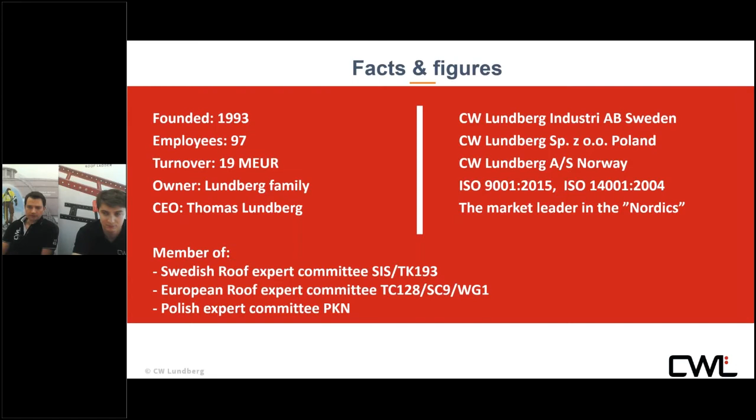We can say for the Nordic countries, we are the market leader. We put a lot of emphasis on creating and working together with European committees that write new norms when it comes to roof safety equipment products.

The majority of the products are tested in Sweden in the research institute called RISE. It's a notified body, so they can perform the tests for harmonized norms, and by harmonized norms we can receive the CE mark.

We also work together with the Technical Research Institute in Sweden, from which we received the P mark, which you can see on the screen. The P mark, together with information about norm 516 and 517, gives you the information that it's safe to anchor yourself with a fall protection equipment.

We also work with the Austrian Standard Institute, one of the few institutes that have a snow fence norm. We also have the Swedish fork, which gives us the information that the company fulfilled the Swedish building regulations and keeps the quality of the products.

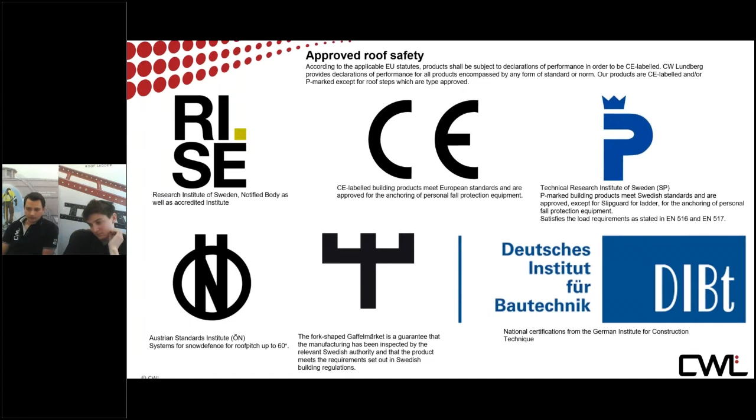Just recently we also started with Germany, and together with the Institute DIBt we try to perform some additional tests for our products. I will give the microphone to Adam, who will tell you a little bit more about the products.

Hello, here's Adam. As Konrad mentioned, we are a producer of roof accessories. I would like to show you one of the kinds of our products - fall protection equipment - and on the screen you can have a look at the wire system and the anchor point.

The wire system is a much more efficient solution because the user is, during the work, all the time protected. He can freely move through the intermediate points. Our wire system is designated for 2 persons at the same time. As Konrad mentioned, it satisfies standard 516.

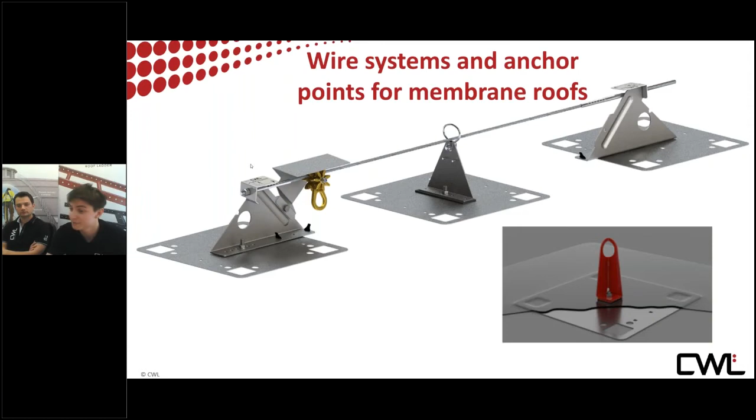In the bottom right corner, you see anchor points - it's for 1 person. This is a wire corner to wire system. You can change direction, for example.

Also mounting on the standing seam. We have a solution for all kinds of roofs - this is for bitumen as well, for PVC.

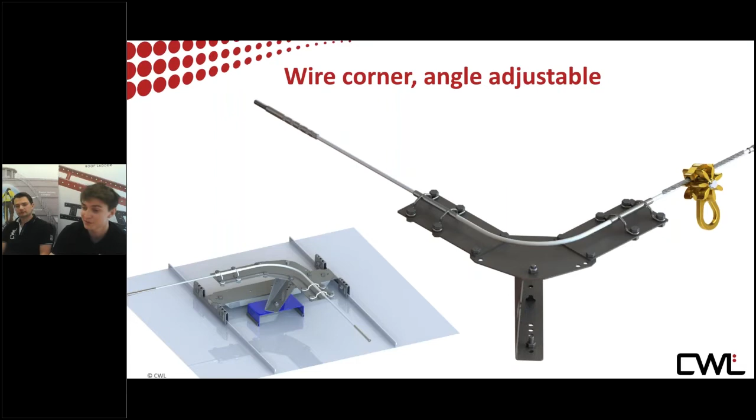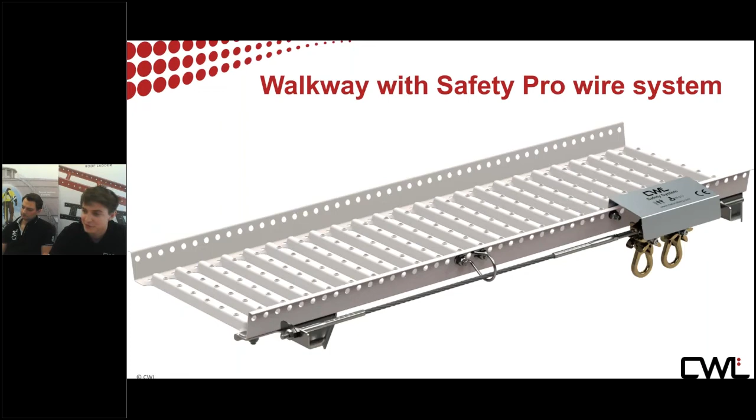It's also an option to walk on the roof on a walkway, which also protects the main membrane. We can also give the extra feature, which is a wire system. Same situation for the walkway - we can change direction by corner.

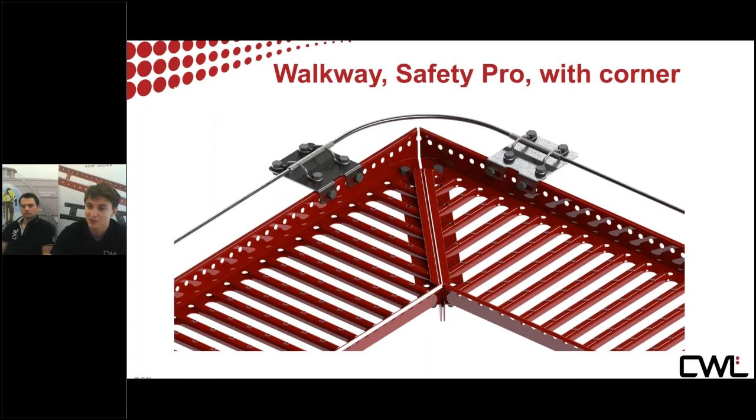The best way to protect a roof edge on a flat roof is, of course, the guardrail. Guardrail satisfies the standard at 1 meter 10 centimeters high. On a PVC roof, you need to mount it with extra fasteners, but I will show you on a video.

Okay, this is a mounting video. Here you can have a look.

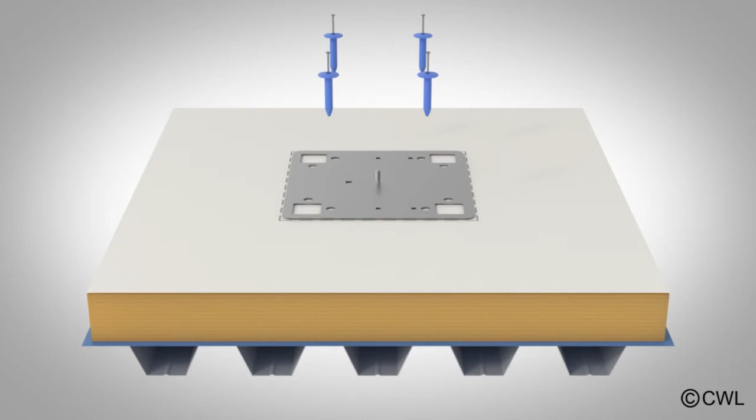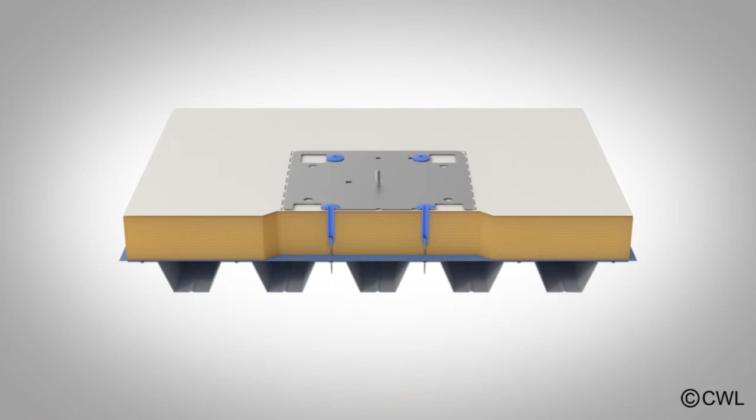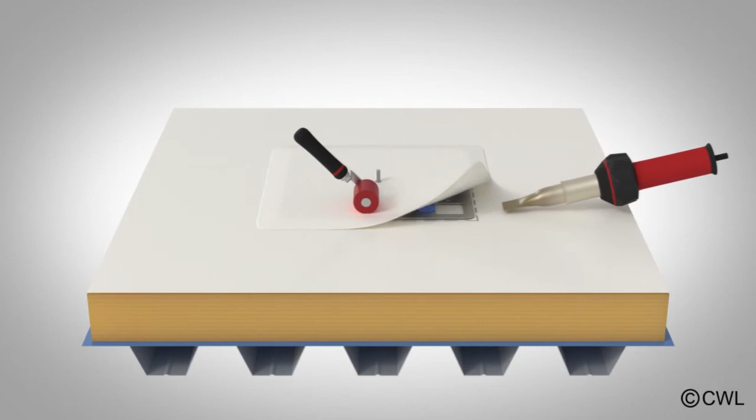You have to put it directly on the existing PVC membrane, with an extra layer of PVC. You have to weld the 4 squares, which stop it from moving around the plate. Then you weld the surface around the plate. On the top, we mount a start bracket.

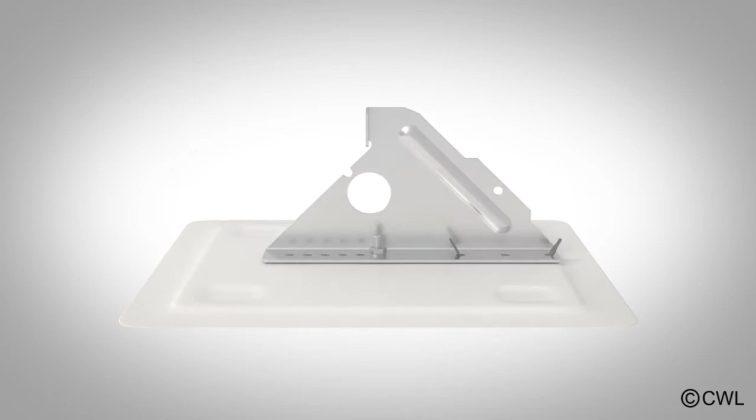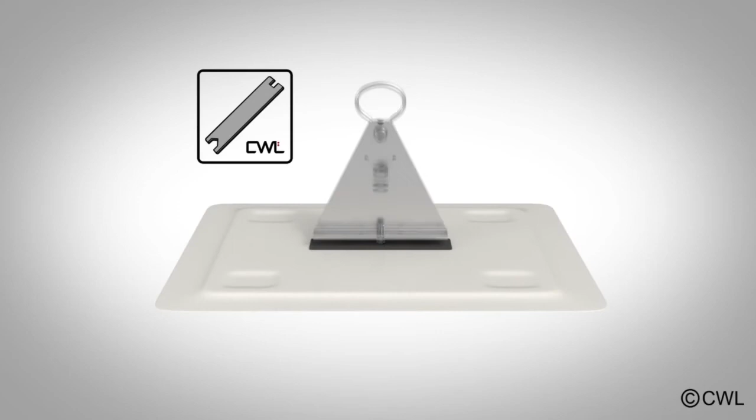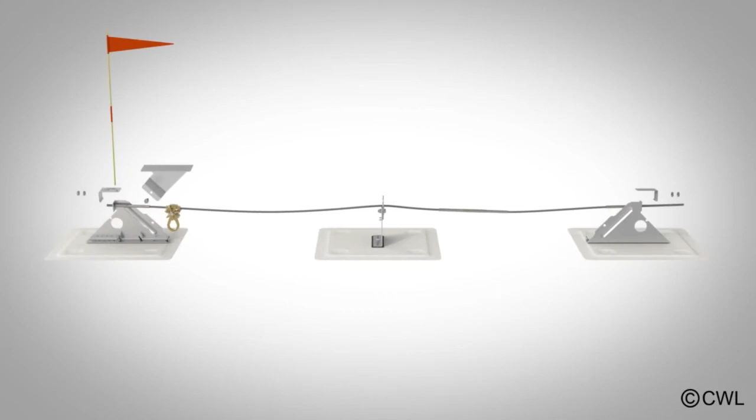Here we have an example for the intermediate point. We mount the intermediate point in the same way as the anchor point, which you have seen previously. We have a CWL tool - this is an extensible wire system, so we have it in pieces, with a small roof for the wire runner.

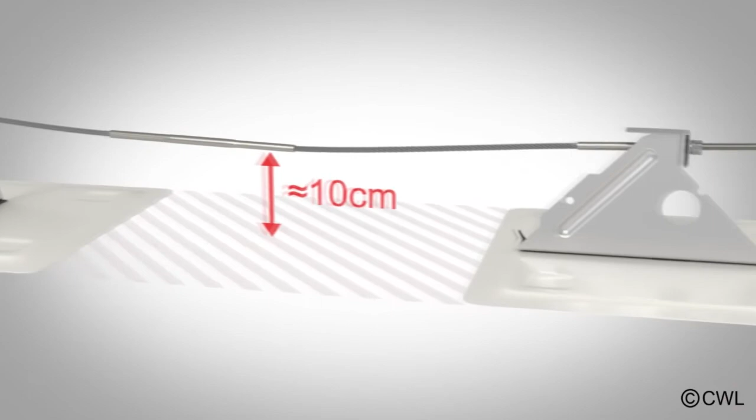And it moves freely through the intermediate point.

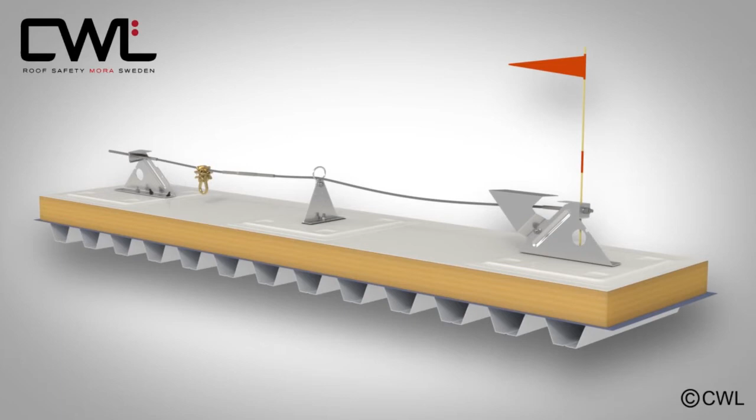Thank you for the video. We're back to the presentation.

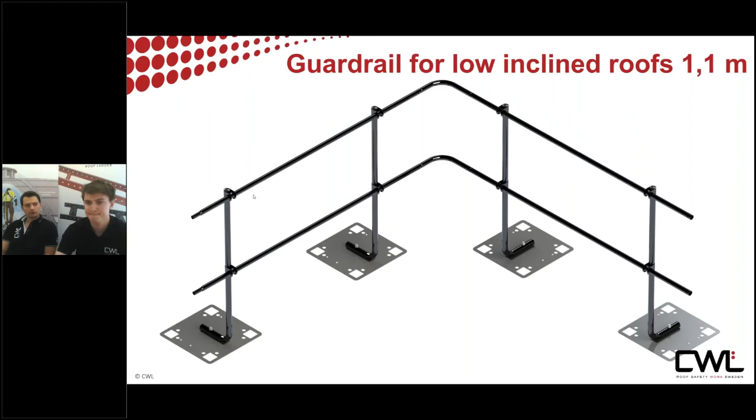It's good to tell you that you can have 2 runners on one wire system. That was a video.

We recently joined the BIM object. We have made all our articles in BIM. We have it as an intelligence object in Revit files, like Revit families, also some in a project. So everything is available on a website.

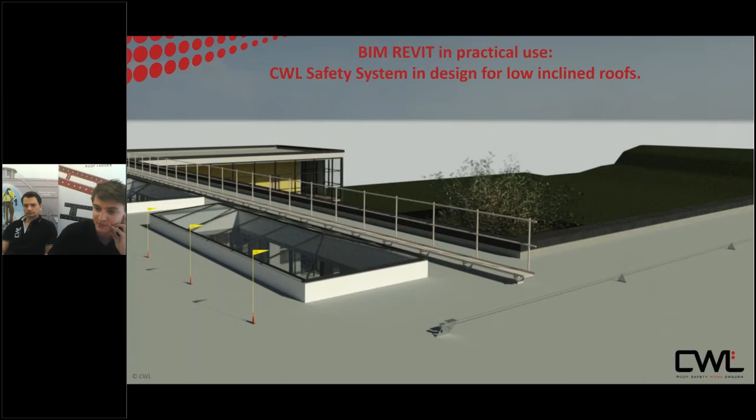Then you can check it directly from the link. Here is the example of a rendering photo. On the image, you see our wire system, anchor points with the flags, and walkway with the barrier.

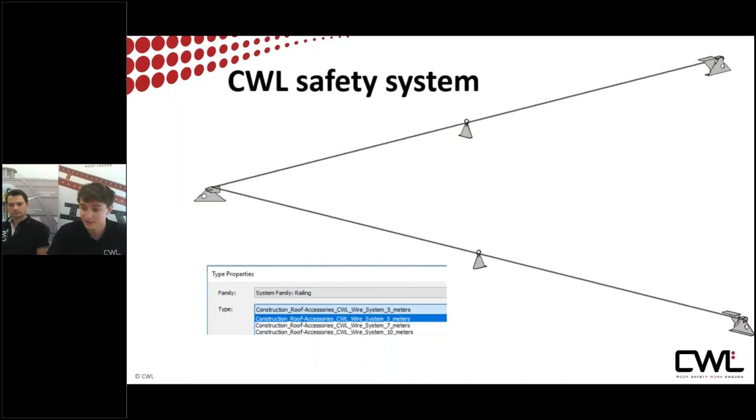This is an example of the file. In the file, you can choose what type. This is exactly the types we offer. It shows five, and the distances between intermediate points in the wire.

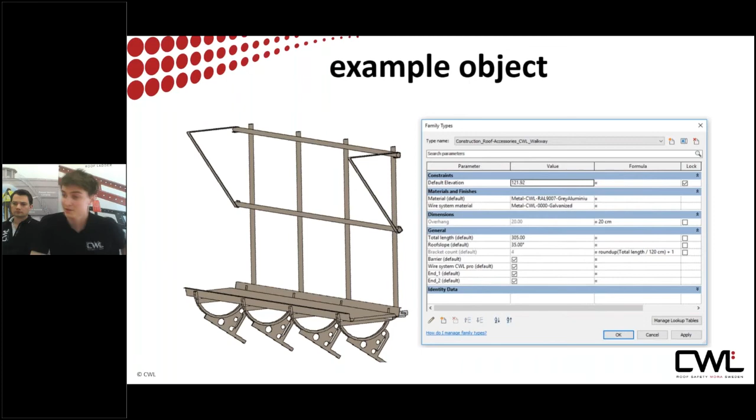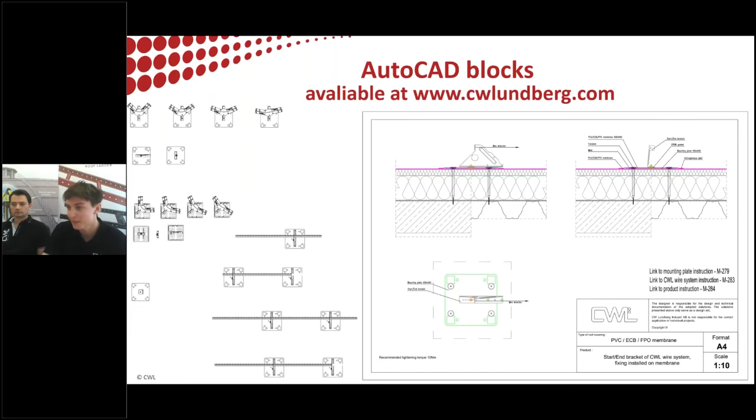Also, we have support for AutoCAD, so everything is available on our website - AutoCAD blocks which you can use in your project. Also details as a section through the roof. All that is available from our website.

And a short recommendation about projecting: the most dangerous zone on the roof, on a flat roof, is the zone 2 meters from the roof edge. So we mount a wire system or our security devices in this area. Also, you can notice that entry points or skylights are also deadly.

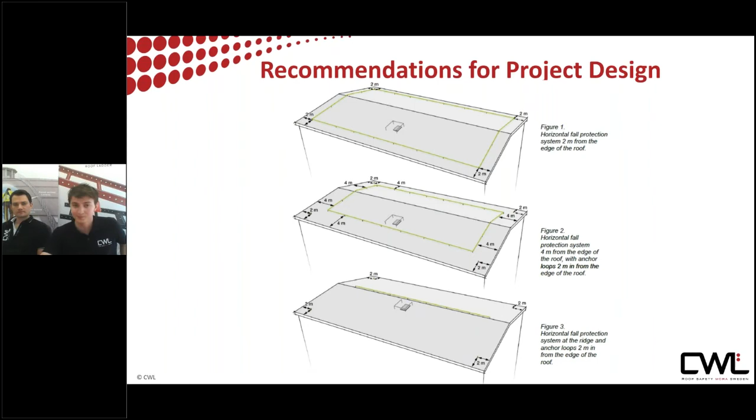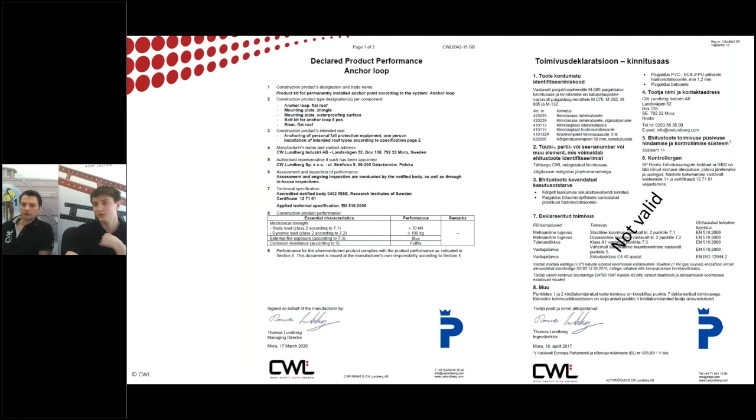Here is an example for our anchor loop, an anchoring point for one person. We have a wire system. We have right now an ongoing discussion about the norm we are tested to. Right now, as we speak, the norm is being constructed - it's called EN 17235. We have it in the table.

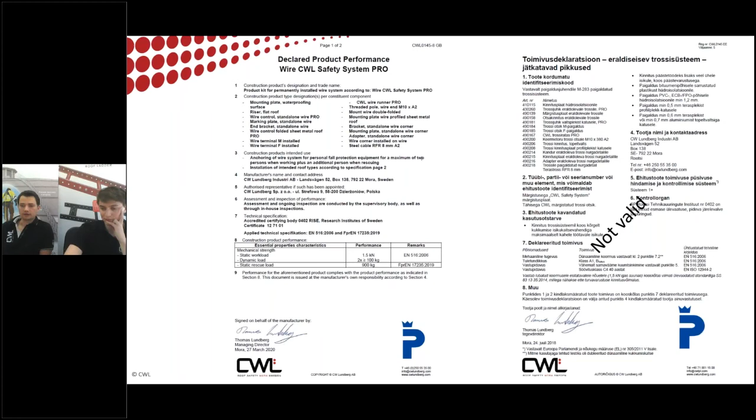It will come very soon, but until it's ready and published, we are using the static load and dynamic load according to the test from norm 516.

Following declaration for walkway - here we have a CE mark because this is a harmonized norm 516, according to which we are testing the product.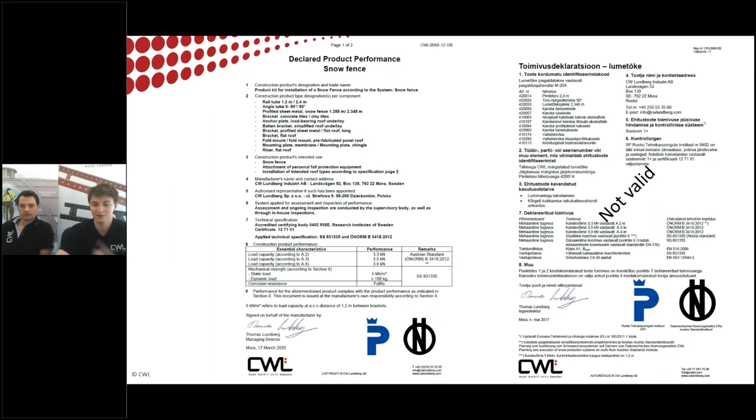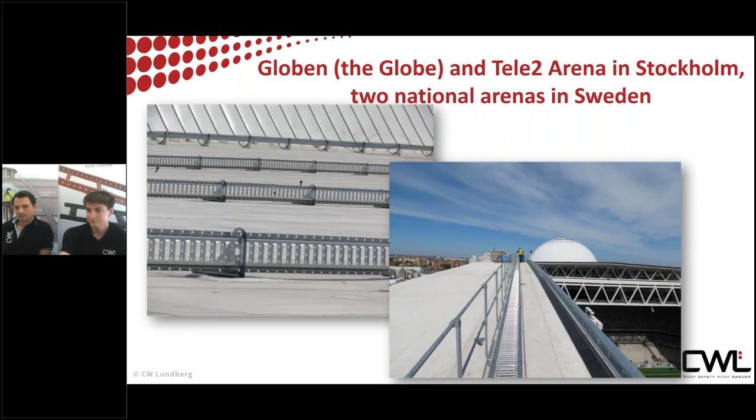A lot of snow fences - a lot of snow in Sweden, so a lot of snow fences, of course, a walkway with a barrier and a safety line next to it. More pictures from this realization.

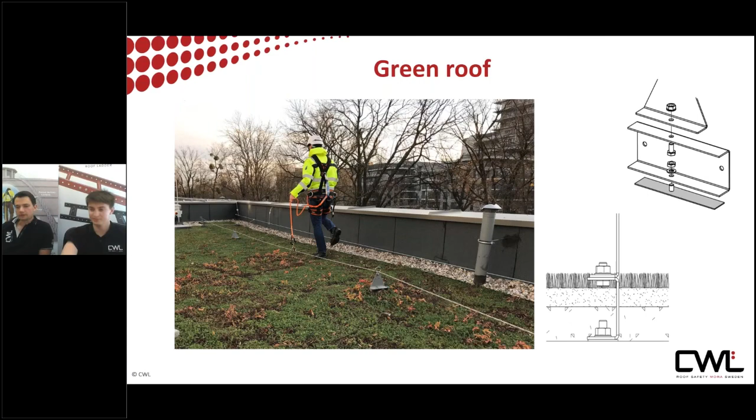Application on green roofs, sedum roofs. We have an application where we have our standard system, and then we just have an extra console where we choose the height of the roof, the grass, or the cinder layer.

Following, we have the possibility to give you a guarantee period in the corrosivity class C4, which is very high because it applies to industrial and coastal areas - it's a 40 year guarantee time.

When it comes to more aggressive atmosphere, we also have C5 industrial and C5 marine areas on which we can give you 20 years of guarantee.

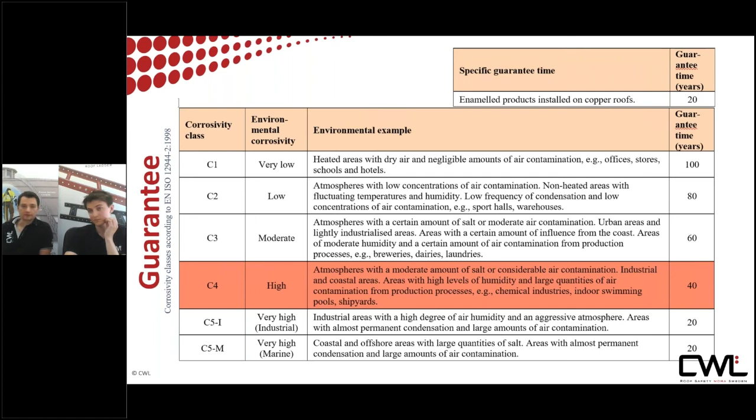And if anything happens to the company, we also give you protection in the form of insurance. So if something happens with the company, the product still has insurance and remains valid.

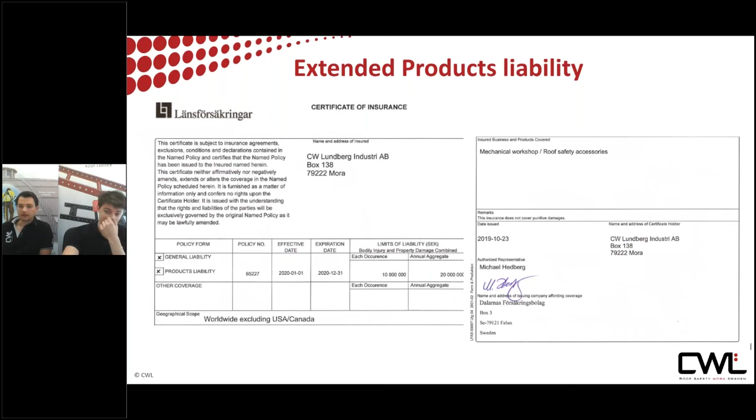Of course, we offer products in different colors. The wire system is excluded from this because it only comes in one color. But when it comes to walkways and snow fences, we have different colors also available on our web page.